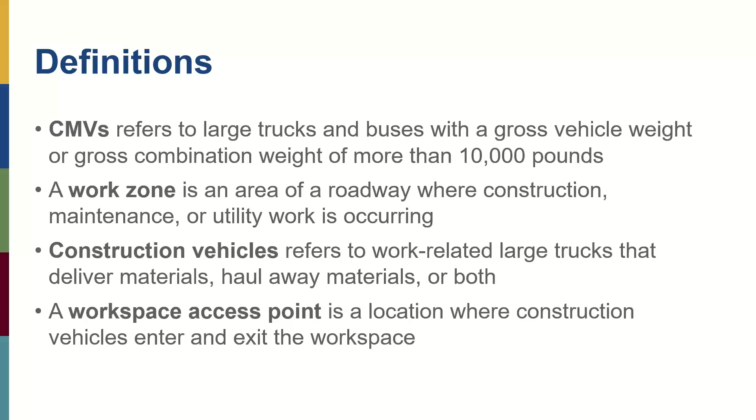And when I say construction vehicles, I'm really referring to large trucks or CMVs that deliver materials, haul away those materials, or both. I realize that pickup trucks and other kinds of vehicles go in and out of there, but our focus was on the construction vehicles because they're the CMV portion that goes in and out. And then again, a workspace access point is that location where maybe there's a break in the barrier or just a bigger, larger section of the drums where those construction vehicles can come in and out and access that work zone.

Just as a comparison, for non-work zone fatal crashes with CMVs, that's about 10 to 13%. So a lot of times you'll hear in various presentations about CMV involvement in work zone crashes being overrepresented, and that's why, because it's happening more in work zones percentage-wise, a higher percentage-wise than in non-work zones.

There are lots of possible reasons for this. A lot of times we talk about there's just more work zones on roadways where CMVs are traveling. We look sometimes at the design elements that we have in work zones. We suspect, because we design those a lot of times for passenger cars, maybe the reduction in shoulder width or lane width or the way we design our lane shifts or crossovers may have some impact on that. We also, again, know that there are just physically more CMVs in that area because they're delivering the materials. And then, of course, we can talk about various driver behaviors or distractions.

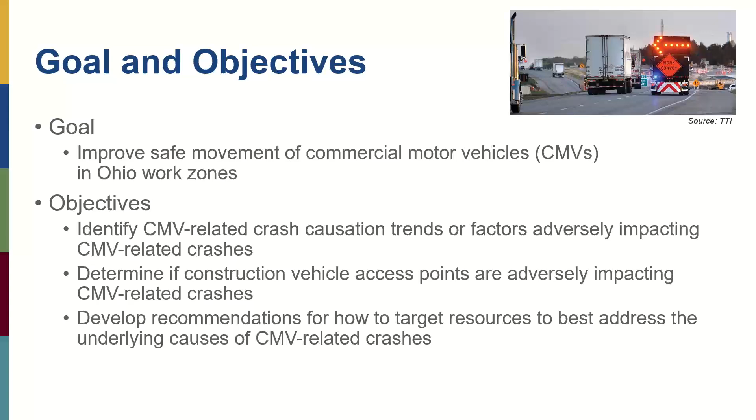It's been talked about a lot on the national perspective and scale lately, so Ohio just wanted to take a deeper dive into what's actually going on around those types of locations. And then we developed some recommendations based on all the research.

So just real quick, high-level literature review summary. Several studies have been conducted in other states that also show there's an overrepresentation of CMVs in work zone crashes. Rear-end crashes tend to be the primary manner of collision, especially on freeways, for CMV-involved work zone crashes.

Intuitively, we know lane closures can result in vehicle queuing. We know those can be a contributing factor to rear-end collisions. But we also have late or forced merges or lane changes that can lead to rear-end or side crashes.

Again, we mentioned the construction vehicles entering the travel lanes, various different lane configurations. We're aware that we changed the alignment in our work zones and what impact that has. Surface conditions can also be degraded in our work zones and contribute, as well as various types of driver behaviors, from speeding to following too closely, distracted driving, impaired driving, etc.

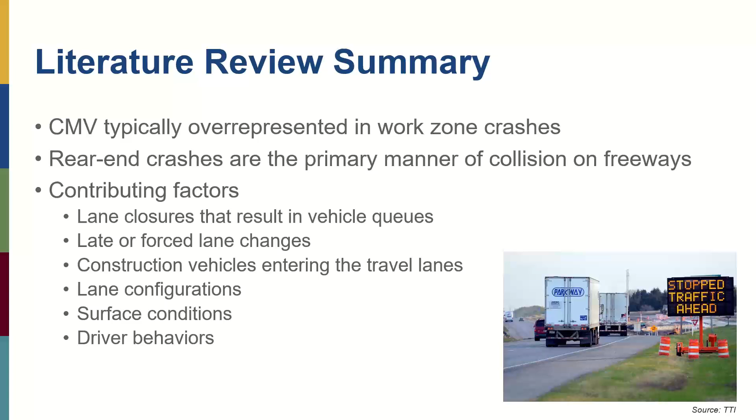So that was all kind of a summary of what existing literature showed, and then again, we wanted to do some deep dives in Ohio.

I did want to highlight that more recently in 2023, FHWA, FMCSA, and NHTSA released a commercial motor vehicle safety in work zones targeted action plan. That's available, as well as a couple of new fact sheets: one looking at providing in-cab traffic-related warning messages to CMVs, and one looking at improving CMVs' ability to navigate work zone lane shifts.

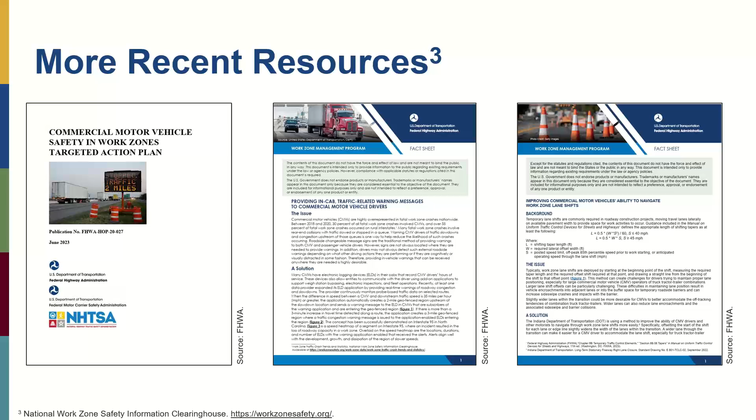So if you're not aware of those documents or you haven't checked out that part of the site, I suggest you go there because there's a lot of good literature that I don't have time to go through today.

So what I want to focus on today is really the two pillars, and the first pillar has two pieces to it. We basically looked at a detailed crash analysis, and then we also did some field studies.

I'm going to give you a high-level, one-slide overview of the preliminary crash analysis we did early on in the project, just to kind of set the stage and have discussions with the Ohio DOT panel.

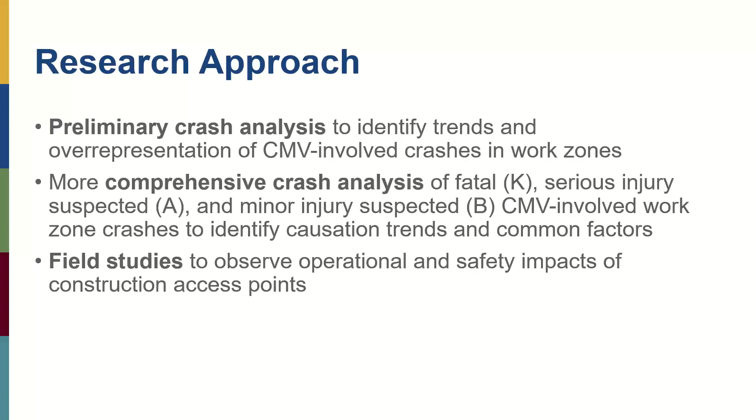Then we embarked on a larger, more comprehensive crash analysis that involved a detailed review of crash narratives and statistical analysis, and then we did some field studies at those construction vehicle access points to really observe the operational and potential safety impacts. So I'm going to jump right into the preliminary crash analysis.

Large scale, what we did is we acquired the crash data for the latest 5 years. At the time we began this project, those latest 5 years were 2017 to 2021. We also obtained information on roadway inventory.

We wanted to look at general trends for non-CMV involved and CMV involved work zone and non-work zone crashes. Basically wanted to compare and see where there were issues, like looking at that overrepresentation of what was going on. We computed some general descriptive statistics for those and compared them.

So overall, just so you know, for Ohio specifically, work zone crashes comprise about 2% of the total crashes, and less than 1% of the total crashes involved a CMV in a work zone.

There were higher percentages of sideswipe passing injury crashes and rear-end fatal crashes in work zones compared to non-work zones when talking about CMV involvement. About 2/3 of the CMV involved work zone crashes occurred in the activity area, and about half of those happened when a lane closure was present.

While most of the lane closure related CMV work zone crashes occurred in the activity area, a quarter of them took place in the transition area, where you're starting to merge, and 15% happened in the advance warning area or before the first warning signs. So you start to see a hint of queuing being involved, just from looking at the data and where those crashes are happening relative to variables like work zone location and type of work.

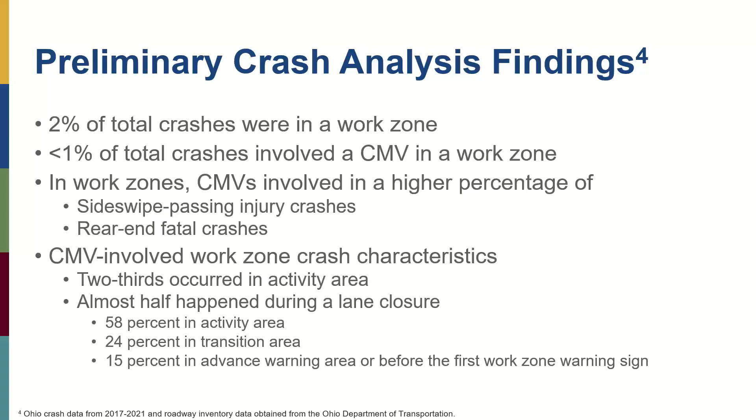Using that first snapshot, we wanted to move into a more comprehensive crash analysis. For this, we focused on KAB crashes, which are fatalities and serious and minor suspected injury crashes. We wanted to do a deep dive into the crash narratives and diagrams, not only using the variables available in the Ohio Crash Database, but looking into those narratives and diagrams to get a better idea of the reasons documented from a work zone perspective that contributed to those crashes.

We wanted to know specifically, did the crash involve a CMV? There is a flag in the Ohio Crash Database, but we've seen in other states that this flag isn't always 100% accurate. So we wanted to double check the narratives, the diagrams, the actual crash reports, and make sure it was a commercial motor vehicle as we defined it—a large truck or bus of 10,000 pounds or more. We also wanted to see if the CMV was the one labeled as at fault.

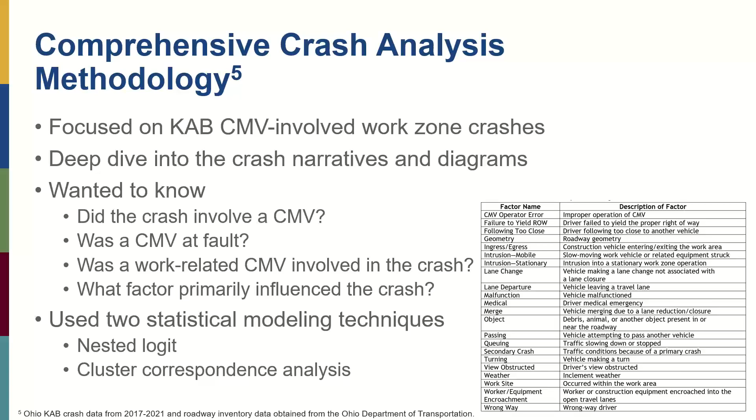We used two statistical modeling techniques. I'm going to mention them today as I go through the data, but I'm not going to spend a lot of detailed discussion on it. Once the report is published, if that's something that interests you, you can get into those details. We did use two statistical analysis modeling techniques, shown on the screen here, and I will briefly mention how those analysis methods supported our findings.

So overall, here is a snapshot. There's going to be a lot more detail in the appendices of the final report once it's published, but this gives you a snapshot of the key findings from the KAB crash analysis. This is, again, CMV involved work zone crashes.

I did include this table here, because in the final report we separate out for the second analysis ODOT maintained roadways and non-ODOT maintained roadways. So I give a little glimpse of that here today. I'll briefly mention some differences for the non-ODOT maintained roadways, since some of those folks may be online, but if you want more details, that will be provided in the final report.

A couple things to mention about the ODOT maintained findings: of the KAB CMV involved work zone crashes, about 83% occurred on freeways. 54% of those were in urban areas and 29% were in rural areas.

We also see across the board that the CMV was at fault about 56% of the time. We do see the percent that a work-related CMV was involved being a little lower on the ODOT maintained roadways.

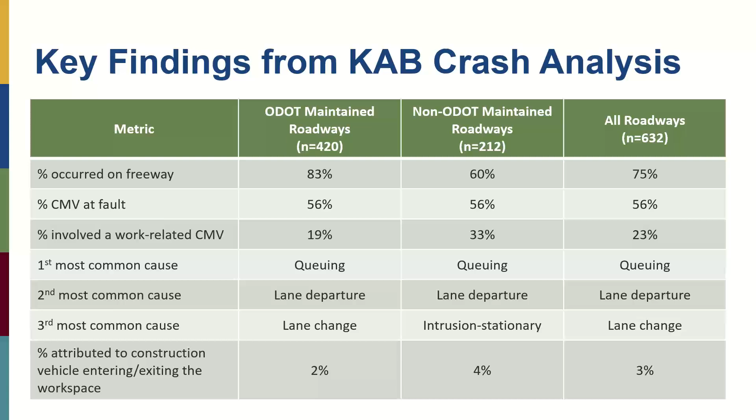So we're going to take a moment and do a deeper dive, based on the time that we have together, into the top 3 common causes for the ODOT maintained roadways. And again, I'll briefly mention if there's any differences for the non-ODOTs, but those details will be in the final report.

So there was 121 queuing related KAB CMV involved work zone crashes on the ODOT maintained roadways. 54% of those occurred in an urban area, so slightly more than half. And you can see here, one of the eye openers is that 94% of them were rear-end collisions, as expected when you have queues and slowing down traffic.

A CMV was at fault in 65% of these crashes, and more than half occurred when a lane closure was present. So again, tying that reduced capacity into the slowdown and resulting in those rear-end crashes.

To note, compared to the non-ODOT maintained roadways, the findings were very similar, except there were more queuing related crashes in rural areas, and that number was 60%.

So for the ODOT maintained roadways, we see that 26% of the slowdowns that were associated with lane closures happened in advance of the warning area or before the first sign. So this is starting to indicate that our queues are backing up outside of the work zone, where motorists may not be aware that, one, a work zone is happening further downstream, or be expecting that sudden slowdown.

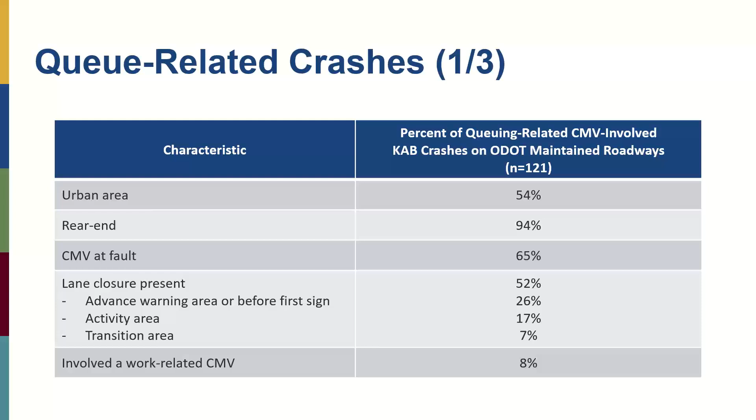So because we were seeing so many crashes still associated with queuing, sudden slowdowns, and lane closures, and having discussions with the ODOT panel and knowing that there were lots of existing policies, procedures in place, one, the permitted lane closure system, as well as their MOT exception policy, they asked us to do a deep dive into the queuing related crashes to really try to see and glean as much information as we could.

And so what we did is we matched each crash to a past project using data from ODOT's Transportation Information Mapping System. We also reviewed ODOT's traffic management and work zone exceptions database to determine whether each project obtained an MOT exception. We reviewed project plans, addenda files, and bid data to determine if a work zone queue detection warning system was used. And we also reviewed daily diaries to obtain insights about temporary traffic control at the time of the crash for the top 10 projects.

So the table that I'm showing here shows that we could successfully match 108 of the crashes to projects out of the 121.

And then you can see there were several projects that had multiple queuing related crashes. So we took a look, I'll talk about it on the next slide, but we also took a look more at the top 10 projects. Basically it shows here on the screen that there were some MOT exceptions that were provided for several of these projects. You can see the variety of exceptions that were allowed, many of them including lane closures or ramp closures, some including the closure of one direction of travel, 3 doing a complete road closure and detour, and then 1 using a crossover.

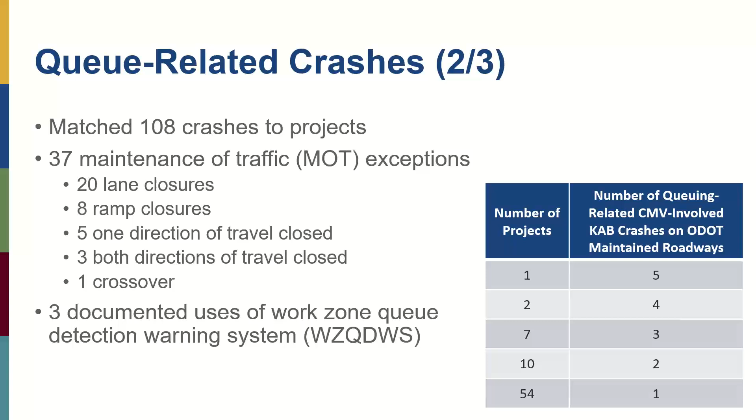3 of the projects also we found documentation for where they were using those work zone queue detection warning systems. So since several of them did have MOT exceptions, the panel asked us to do that deeper dive into the top 10, to try to look at the question of basically: was an exception allowed, yet we still saw crashes? Was one not accepted? Was the lane closure during the permitted or allowable time? Again, just trying to get insights into what was going on so that we could help make recommendations to further improve policies as needed.

So we looked at those top 10 projects, dove even deeper into the information, and it revealed that 8% of those crashes occurred when a lane closure was present but was not permitted by any of the documentation. That was whether or not it was permitted by the lane closure schedule or the plans, because sometimes the plans, based on the impact analysis, had additional time frames when they could not have a lane closure present, and then also whether or not they had received an MOT exception and whether that was for that.

So we did find that some of the crashes were related to lane closures that probably shouldn't have been in place. We also did see some crashes, 29% actually, a little larger, when the lane closure was active and it was permitted or an MOT exception was allowed.

And so this really starts to ask the question of what else needs to be involved with the initial work zone impact analysis, a more detailed one as you get closer into the MOT exception process, to make sure that the exceptions you're allowing and the permitting lane closure system are accurately reflecting what's happening on the roadway. I think this was kind of eye-opening for all of us, just knowing that there may need to be some tweaks done in the future to better capture what's going on.

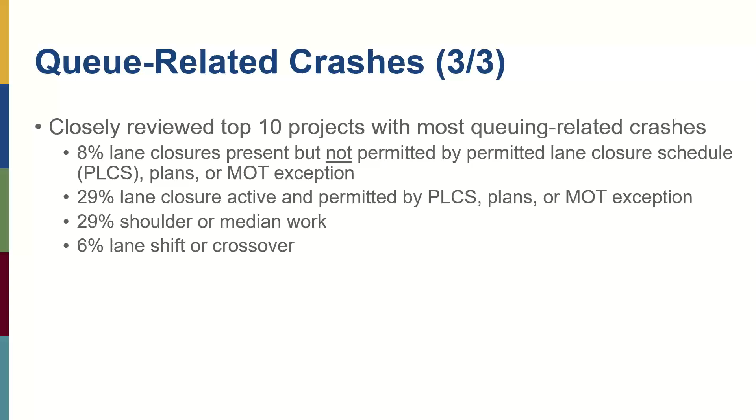So anticipating this, several of the narratives actually mentioned, or the diaries would mention, that a crash had happened and would note something that was going on. A lane shift or crossover was specifically mentioned in a few of those as well. So it was good to see that, to be able to confirm what we had been seeing in the other analysis. And again, this is a deeper dive of a handful of projects just because of the time it takes to do it, but it did give us some additional insights that we didn't have even just from the more comprehensive crash analysis and the statistical analysis that we did to support that.

So also we wanted to look at the lane departure related crashes. That was the second most common cause on the ODOT maintained roadways. And here again, we see that these crashes occurred most in urban areas. A CMV was at fault in about 68% of these crashes, but a work-related CMV was only involved in about 5% of the crashes. The most prevalent crash types for the lane departure related crashes were fixed object and sideswipe passing.

So when we reviewed the crash narratives, we determined that about two-thirds of the lane departure related KAB CMV involved work zone crashes on those ODOT maintained roadways were a vehicle that left the roadway, completely, not just left the lane, but left the roadway. One-third of them were vehicles that just left their lane, so they drifted out of their lane, they swerved out of their lane, or they crossed over into another travel lane when they were not changing lanes. So that was a separate category, that lane changing was separate from lane departure.

41% of the lane departure related crashes occurred when there was work on the shoulder or median, 23% when there was a lane closure, and 22% when there was a lane shift or crossover. Then a smaller percentage, about 8%, for intermittent or moving work.

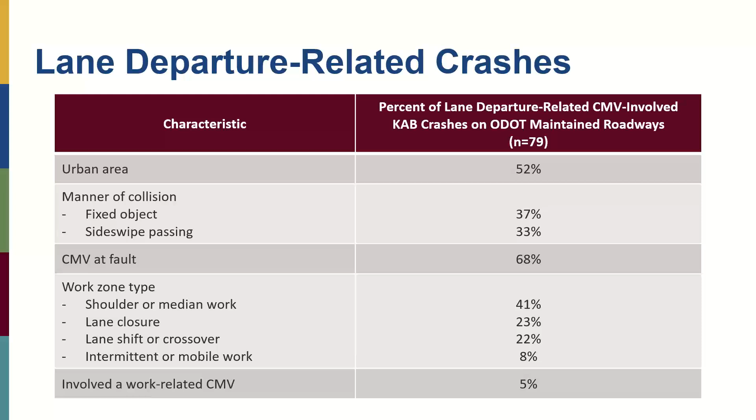So what we were seeing and reading from the narrative analysis, while simultaneously running the larger data set through the modeling, we were confirming and validating that we were seeing the same thing, and these two analyses were complementing each other.

The last group I want to talk about today is the lane change related crashes. This was the third most common cause on the ODOT maintained roadways. This is a vehicle changing lanes, but not because of merging due to a lane reduction or closure. We kept those separately - lane closure merging as one category, and regular lane changing as a separate category.

We did that because we wanted to be able to see the differences between just lane changing behavior in a work zone and having to merge because of a loss of capacity.

So again, the lane change crashes happen most often in urban areas. We see a larger shift to urban here, with 82%. The CMVs were at fault in about 64% of these crashes, but a work-related CMV was only involved in about 7%. The most prevalent crash type was sideswipe passing collisions at 90%.

46% of the lane change related crashes occurred when there was work on the shoulder or median, 21% when there was a lane shift or crossover, 16% during a lane closure, and 8% during intermittent or moving work. Most of the crashes, again, occurred in the activity area.

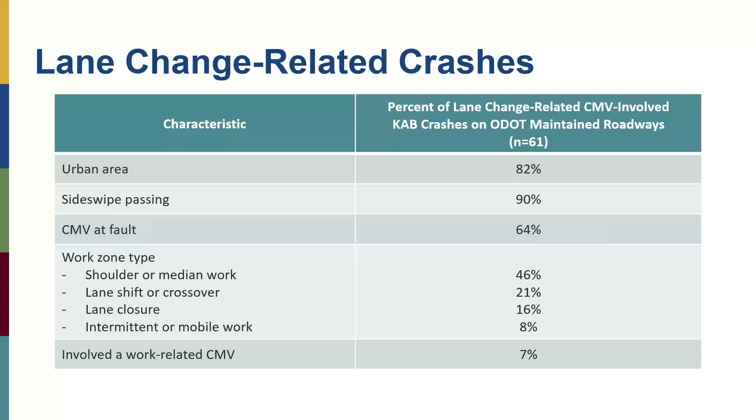Real quick, just wanted to talk about construction vehicle ingress and egress crashes. 2% again were ODOT maintained. Interestingly, 70% resulted when a vehicle was exiting the workspace. 90% involved the construction vehicle.

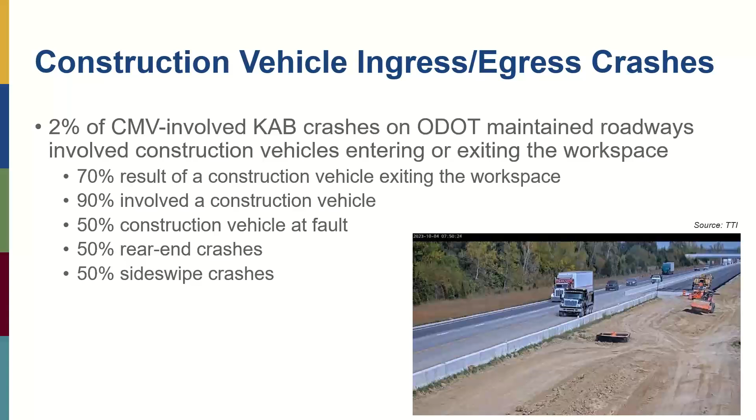You may ask, well, what about the other 10%? Those were crashes where the narrative mentioned the construction vehicle exiting, and they were involved in the crash, but they caused some kind of jockeying, lane changing, or sudden slowdown that caused other vehicles to crash. 50% of the time the construction vehicle was at fault, and it was an even split between rear-end and sideswipe crashes.

So I'm going to pause there and see if we have any questions about the crash study. Maybe a couple I could address right now, and then we'll dive quickly into the field study part. Sounds good.

We do have two questions. The first one is: by work-related CMV, which was in quotes, do we mean CMVs from contractors and suppliers on the project for which there is that specific work zone?

Yes. Okay, next question. Do we have any stats on if queue-related crashes were more likely, and how much more, during lane closures not being permitted under the PLCS?

So we just have that information for those top 10 projects. We only looked at 10 projects because that was a heavier lift, something we tapped on near the end of the project since we were asking a lot of questions about the queue-related crashes, even after doing the deeper dive and statistical analysis. So I don't overall have some kind of number for that. It would just be the information in the publication about those 10 projects.

So the percentages I put up there on the one slide were just coming from those 10 projects, not even the 108 crashes. I forget how many crashes it represented, but it was the top 10 projects in the little table. Great, and then one more quick question.

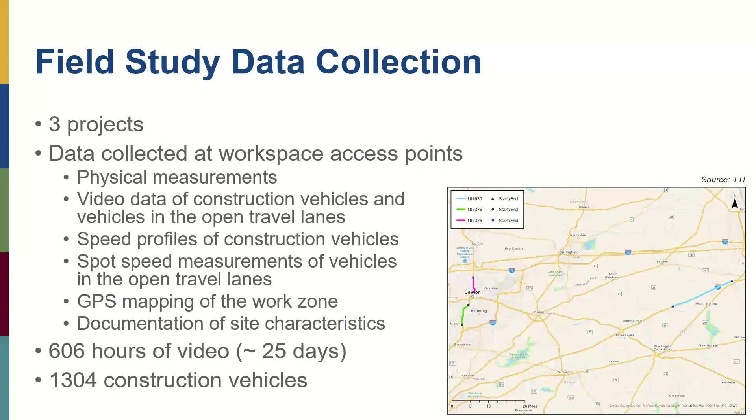I will say that most of our data reduction and analysis focused on the light blue work zone on I-71, mainly because it had upwards of, I think at one time, 10 workspace access points. It was a really long project, so we could collect a lot more data at different workspace access points over the time we had a video trailer at that location. Specifically at that location, there were 1,271 of the construction vehicles. So you can see how much that project played into our data set size.

These are the things from the data we collected that we analyzed. We compared the workspace access point designs to the ODOT standard construction drawing, which is the MT 103.10. We reviewed the construction vehicles' entry and exit paths, and we organized them into 10 categories. I'll go into a little bit more detail on that in a minute.

We computed post-encroachment time as well as the time gap between construction vehicles entering and exiting and the vehicles immediately following or before, and I'll go into some details about how we did that. We used that as a surrogate safety measure. We also looked at the speed of the trucks themselves decelerating and accelerating, and computed the average speed data for the main lane traffic to give us an idea. We talk a lot about speed differentials when large CMVs are coming in and out of the work zones, so we wanted to capture that and have some quantitative numbers to associate with it.

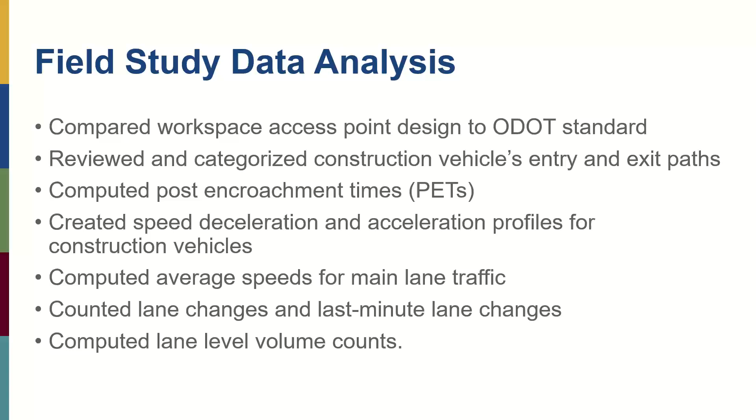And then we looked at lane change behavior and also computed some volumes. So I don't have time to go into deep details on everything today, but I am going to try to give you a snapshot and a sneak peek to hopefully heighten your desire to want to go check out the report and get more details.

So this is a quick drawing of the post-encroachment time methodology that we used as a surrogate safety measure. Traditionally, this is looked at a lot at intersections, but we found a couple of literature papers about using it for merging behaviors, and we adapted that to our situation.

The research team calculated 1 to 4 PETs for each construction vehicle, dependent on whether it was entering or exiting, and whether it exited and stayed in the inside lane or immediately went over into the outside lane. Most of these were 2-lane in each direction type facilities.

For those entering, as soon as the truck would leave the main lanes and enter into the designated lane used in the construction drawing standard, we would say that's where the line was. And then we would calculate the time back to when the next vehicle passed. So the trucks entering the work zone was a fairly simple calculation.

For those exiting, it was a little bit more detailed. We had to look at when the vehicle first started to enter the inside lane. All of these workspace access points were in the median, so these were trucks entering into the inside or fast lane.

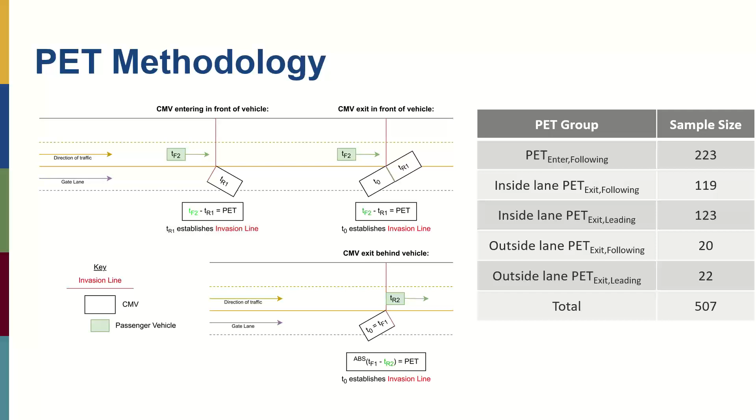Sometimes, depending on where we could put the video trailer, and depending on how they were accessing the work zone, we couldn't use all of our video for the PET computations. So that's why it's fewer vehicles than I mentioned earlier overall.

So just real quickly on the workspace access point design, this is a snippet from the standard that Ohio DOT uses, to show you if you're not familiar. Trucks are supposed to come in and decelerate in the designated lane outside of the main travel lanes and enter into opening A. When they exit, they come out of opening B and then use the dedicated area to accelerate and merge with traffic. We found that most of the workspace access points implemented were according to the standard.

We did observe a couple of instances where they were used differently than what I just described to facilitate material delivery, and I'll show you that in a second.

We also observed other types of workspace access point design. We saw some we call slip entries, at the beginning or end of a work zone, where they would use the inside shoulder or added pavement to get off and exit in, or vice versa, exit out at the end of the work zone. Occasionally we also saw some contractors using U-turn turnarounds to help trucks more quickly access the opposite direction of travel.

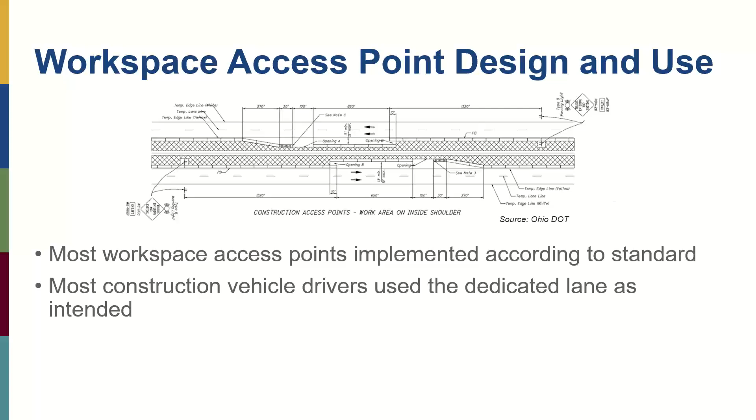But most often the construction vehicle drivers use the dedicated lane as intended, and you can see that here. This is just a drawing showing that concept of opening A and opening B. These are for construction vehicles that were decelerating and entering into the workspace.

What ODOT would like, according to a note on the standard, is vehicle path number 1, which about 2/3 of the trucks did. That is using as much of that deceleration lane as possible and not decelerating necessarily in the travel lane itself.

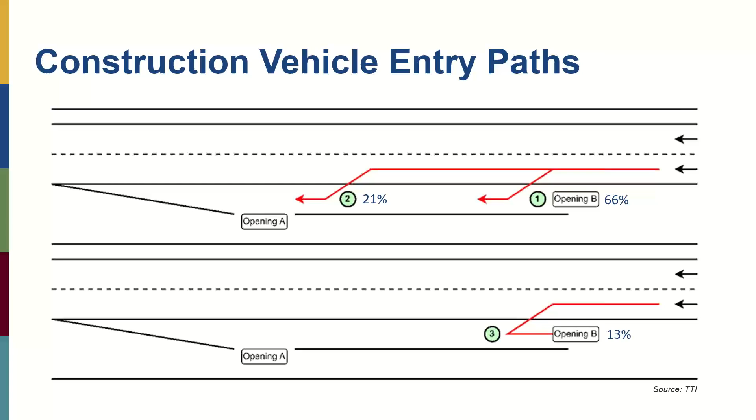But you can see some trucks would basically - the 2 represents they went halfway down the deceleration lane. That was our line in the sand where we made a difference between number 1 and number 2 paths. And number 3 was one of those facilitating material delivery - they couldn't access any other way, so they actually would come in and then back into that entry.

Just real quickly, I think what is interesting is these deceleration profiles. These are fully loaded dump trucks, about 30 of them, that we were able to get speed profiles for. They actually start decelerating in the inside travel lane about 400 to 800 feet before they enter the dedicated lane. So what you're seeing here, the 0 point, is opening A. From opening A, it's about 800 to 1200 feet upstream, but once where the dedicated lane is, it's about 400 to 800 feet upstream of that. So they are still using that main lane to decelerate.

Their initial average speed was 55 miles an hour, ranging from 41 to 62. Their average speed when they entered the dedicated lane was about 43 miles an hour, ranging from 29 to 59 miles an hour. Interestingly, the vehicles in the main lanes were traveling on average about 66 miles an hour in the area, and the posted speed limit was 60.

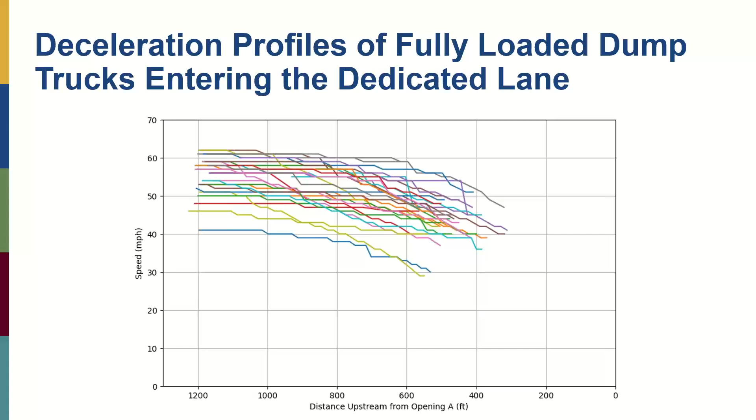So what did that result in? Basically, it resulted in lane changes as expected. We were able to look at lane changes surrounding about 200 construction vehicles. You can see it averaged out to be about 1 lane change per construction vehicle, with about 3/4 of them moving from the inside lane to the outside lane as we'd want. Occasionally, unfortunately, we did still have people move the opposite direction - that just kind of depended on traffic and what was going on. But you can see here that 43% of those were classified as last-minute lane changes, meaning they got fairly close to the back of the truck before making a last-minute lane change into that opposite lane.

From the post-encroachment time findings, we were able to compute that it was about 3.3 seconds behind was the average of how far the vehicle was behind. And then you can see the range and the standard deviation here.

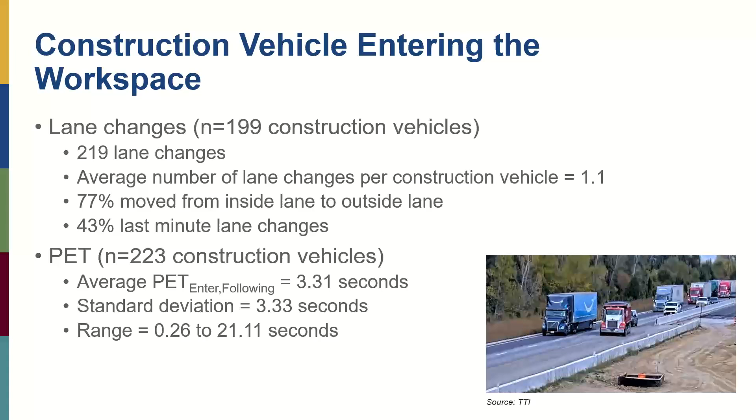We also had the construction vehicles that exited the standard design that ODOT has. Here, number 5 would be the path that is noted and encouraged on the standard sheet - again, that's using most of the dedicated lane to accelerate. The number 4 path would be drivers that entered main lane traffic before the halfway point of the designated lane length. We can see almost 60% were using the desired path, but almost a quarter were getting over maybe a little earlier.

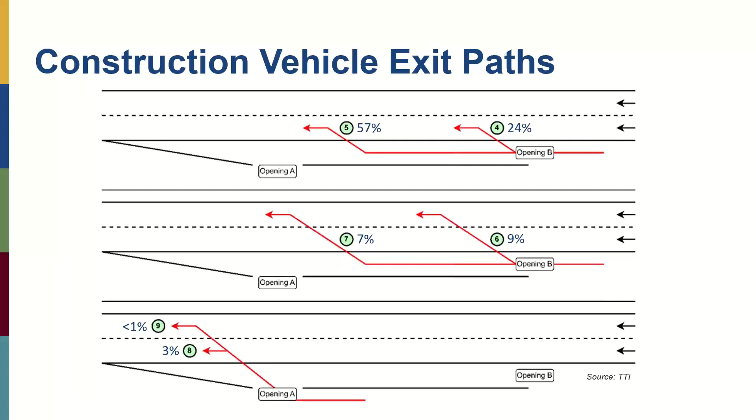Now that could be because traffic was light, right, and volumes were light. Again, we have detailed volume data in the final publication, but we did see drivers doing maneuver 4, 6, and 7 more when the traffic volume was light and they had the ability to go ahead and take that gap. And then you can see some unique uses of opening A as well.

So we again have the acceleration profiles for these trucks, which I thought was very eye-opening. We did some empty dump trucks as well as fully loaded dump trucks - 19 empty, 32 fully loaded. You may be asking why it starts at 10 miles an hour in these graphs. That's because the equipment we use does not register below 10 miles an hour.

So they usually came up to the opening B gap, would stop most of the times, kind of gauge what kind of gap they could find in traffic, and then go. So they did start most times from 0. We just couldn't capture between 0 and 10 miles an hour.

The average speed of the empty dump trucks when they entered the travel lane was 42 miles an hour. The average speed for the fully loaded trucks was 27 miles an hour. And in this vicinity, during the time we were collecting this similar data, the average travel speeds was about 69 miles an hour, again with a posted speed limit of 60. So you can really start to see that speed differential come to life on these trucks that are trying to accelerate and enter.

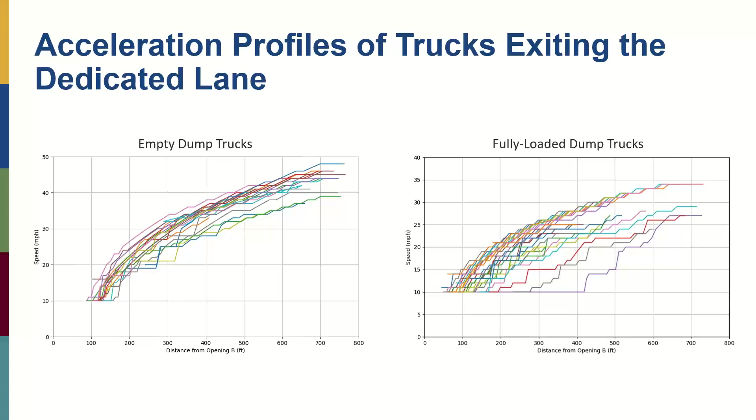Obviously, there's a large difference between 27 and 69 miles an hour, slightly less difference between 42 and 69. But again, before now, and in lots of the conversations I had in national workshops and stakeholder events, we knew there was a speed differential, but really didn't have data to show exactly what that was.

So with those slower trucks entering, we also looked at lane changes. We see here 81% moved from the inside lane to the outside lane, and we did see 28% last-minute lane changes. So less last-minute lane changes with the trucks entering than exiting. I think that's because you could see the trucks utilizing the dedicated lane, so people had more time to get over. We see a higher percentage moving from the inside to the outside lane. We also see that with the gap. Here's the PET findings.

I went ahead and broke it out by the following vehicle. We see a larger PET of about 5.8 compared to that 3.3 for the exiting vehicle, for the entering trucks, the ones that were exiting the main lanes. And then we obviously see the leading gap too. So basically about 15 seconds was the gap that the trucks were taking.

Now, that said, 15 seconds doesn't last long when you have large speed differentials, but I wanted to be able to provide that data to you, and there's some more information here. There's a lot more details in the appendices. We break all the PET findings down by vehicle path that I showed you earlier. Here, I'm just showing you the overall data and not particularly honing in on one type of vehicle path.

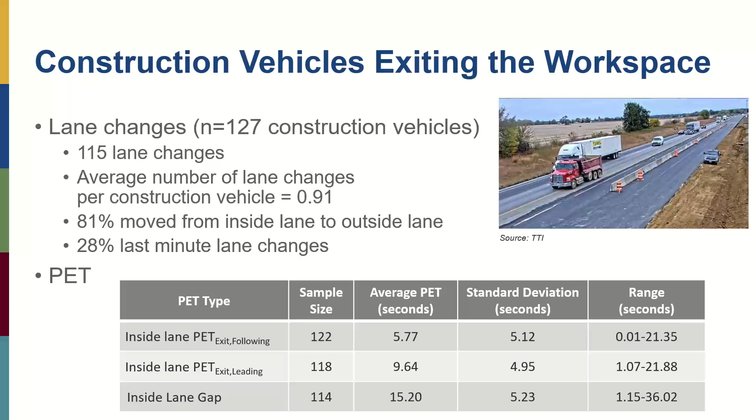I'm going to take a break there and ask if there's any questions on the field studies, and then I can go through with the remaining of our time what our recommendations were. No questions at this time.

Okay, so the recommendations, we had 10 of them in total. The first was to monitor the implementation of the new permitted lane closure schedule that was made available in February of '24. So you might have noticed our crash data was older than that, and that was because of when we started the project and what was available at the time. So we're aware that some of those deeper dives that we did and some of the projects that we had were for the previous system.

So we think that ODOT should continue to monitor, especially looking at, maybe doing some deeper dives, looking at the risk, following those ones that get the MOT exceptions, and making sure that, what's happening in those when they're allowing those exceptions, et cetera, and seeing how the new permitted lane closure schedule is working with respect to the capacity issues that we may have seen on some of the projects, that their allowable times for lane closures may change based on the new system.

We also think that they should closely monitor projects with the approved MOT. That's why when we were seeing some of those, we saw some crashes with MOT exceptions and some without. So closely monitoring them, maybe there's some reports that can be done or auto-generated to help more closely follow those ones that are given MOT exceptions.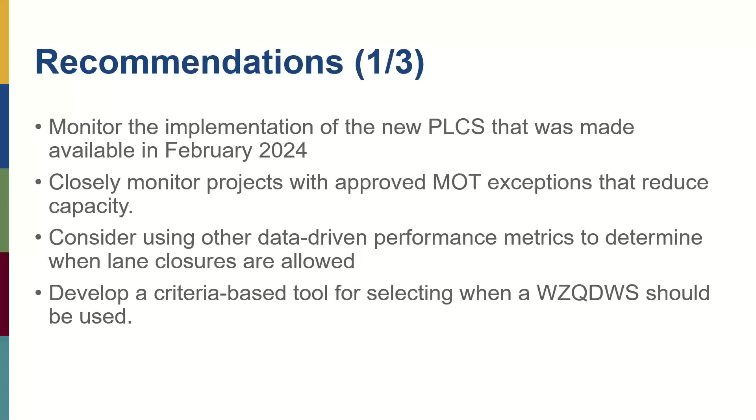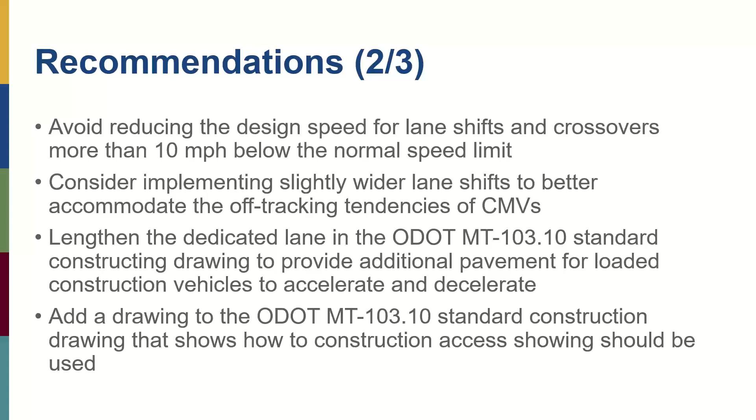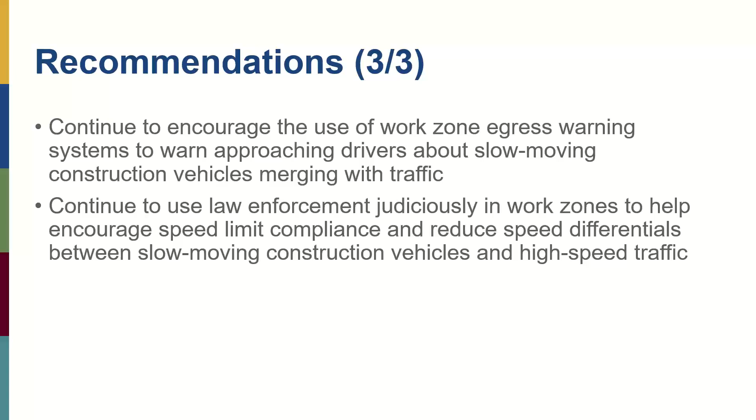And then last but not least, we wanted to continue to encourage the use of the work zone egress warning systems that warn approaching drivers about slow moving construction vehicles. We didn't specifically look at those in this project. Other work is going on nationally looking at those types of ITS systems, but because of the findings from the field studies, we thought it was a good idea to continue and promote the use of those. We also wanted to continue to use law enforcement judiciously in work zones to help encourage speed limit compliance and reduce speed differentials between those slow-moving construction vehicles and high-speed traffic.

So those were the 10 recommendations that we had. I think we have about 3 or 4 minutes left if we need to answer any additional questions.

There's a couple questions. One is they would like to know when the full report will be published and available to the public. I do not know. The full report, the final report is in the hands of ODOT. I'm not sure how long that typically takes internally for them to do that. I'll make certain that the research office has a complete list of everyone who is on this webinar so they can notify you when it is published out.

The last question we have right now is, is there a link to the guidance document from Indiana? There is. I don't have the ability to provide that right now. Is that something we can send out with the email if I give it to you, Victoria? I can sit here and try to find it. No, you can send me the link and I'll send it out with the follow-up email.